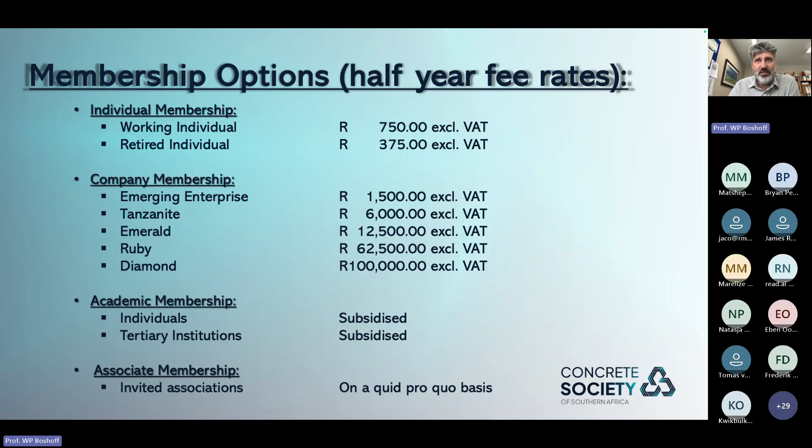And then also associate members. Just who are our members at the moment? We've got Diamond members. We've got Creso and Quick Group.

We've got Emerald members, the 6 companies listed on the screen now. Then we've got 2 screens of Tanzanite members. I'm not going to single anyone out, you can just see all their names. And Tanzanite members, the second screen, as you can see, is a number of people that's growing every week or every 2 weeks.

Emerging enterprise members as well, we've got 2. And then we've got associate members, similar organizations like us, just different focus, and we work together with these people. And then our academic members, you can see there are 8 of them involved.

Now, we've got these CONCRETEfix and CONCRETEclass webinars. Today is a CONCRETEfix, and why it's a CONCRETEfix is get your dosage or your fix of concrete knowledge of the most advanced and newest technology, research, practical implication, or practical products, or whatever. So it's really about the newest and the best and the latest in the industry and research.

Future dates to keep in mind: on October 23rd, Willie Steenkamp will be speaking, and Jaco Kokart will be speaking on the 20th of November. And then Vandi Ulefi from AECOM will be speaking on the 19th of February next year. We've already got them lined up. The exact topics we're still finalizing.

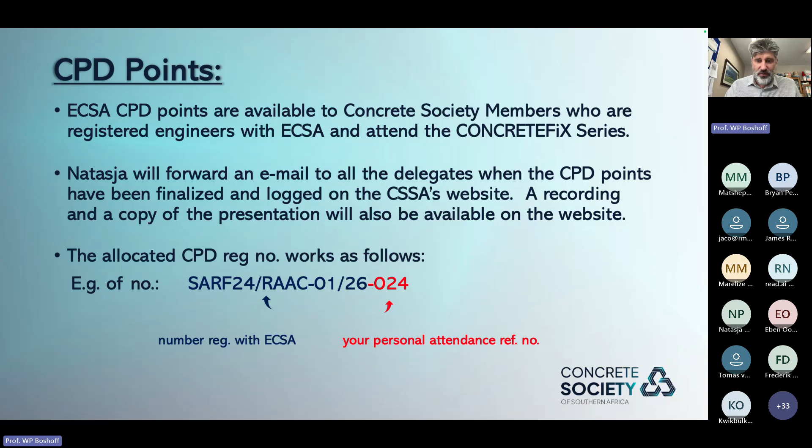And then CPD points, I've said in the previous 2 events, webinars, that we are behind. It's not really we behind as a concrete society, ECSA was behind with all the approval of the CPD points. They are up to date now, and we got all of that, and we're up to date as well. So all your latest CPD points, your numbers you need for submission, you will find on our website, you'll find the link for that on our website. And if you struggle finding the link or not getting your information, please contact Natasja at the Concrete Society.

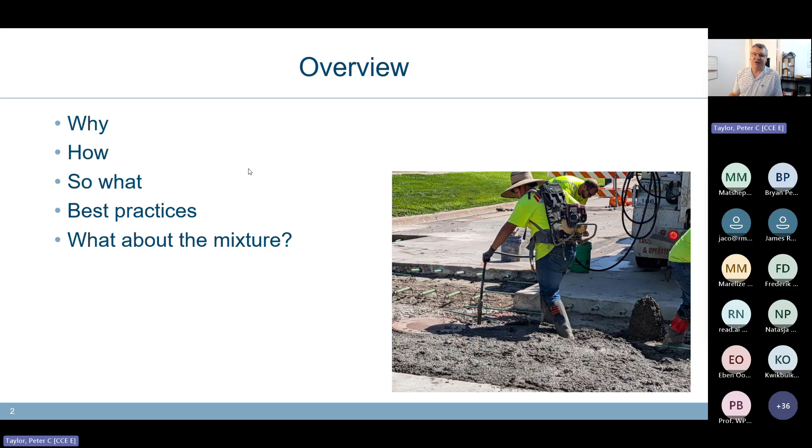So a very quick image here I tend to use just for a total overview of the things we need to pay attention to when building with concrete. And again, I need to emphasize: the institution I work for is entirely focused on pavements, but I think a lot of what we talk about, the thought processes, still roll over into almost any concrete application, running from RCC through bridge decks, structural concrete—I think we can make them all apply here.

But we start off the process looking at the performance of what we need—what is the strength, which every structural engineer lives and dies by—but what are the durability requirements? What are the levers that we can pull to get there? And then we need to do some measuring. Can we be sure that the mixture is going to deliver the performance we're looking for?

That's been the focus of the performance engineered mixtures program that I've been heading up for the last 15 years. Then the batching, making the concrete, the quality control, making sure we've got the right amount of water and air in the concrete. And yes, I know you don't need air, but it's a big issue in our lives.

Right now, today, it is 18 degrees, cloudy and beautiful as we head into fall. You guys are warming up and heading into spring, and you haven't had any freeze-thaw cycles. We're heading into a lot of them.

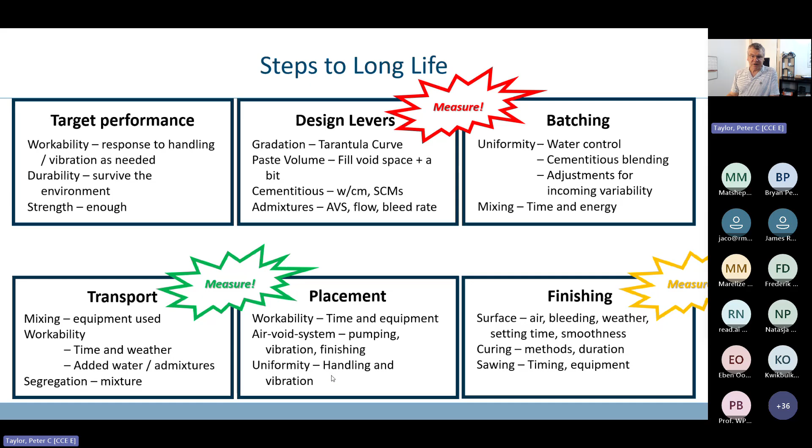So again, this is the whole picture. We're going to be focusing on the bottom middle for today's discussion. So why do we vibrate? Well, the obvious answer is to consolidate it, to get the big bubbles out of the concrete.

And this is not new. It's been in every book that I've been involved in writing, from Design and Control, Fulton's, and the IMCP manual. All of these publications say don't do it. So yeah, I know everybody does it.

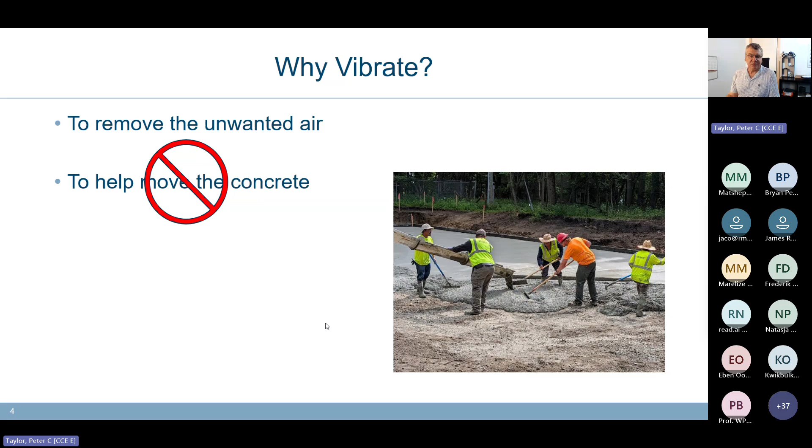Don't do it. We also use vibration to help bring a little cream to the surface so that the finishing crew has something to work with.

Now, sometimes the mixture is so bad it's beyond redemption. This photograph is from a test section we were building with a non-traditional cementitious system, and the delivery time was 40 minutes, and the admixtures had given up the ghost and left the mixture within 10 to 15 minutes of batching. And so what was delivered was a brick, and the crew could not do anything with this, regardless of how much vibration they put into it, how much floating they did to it.

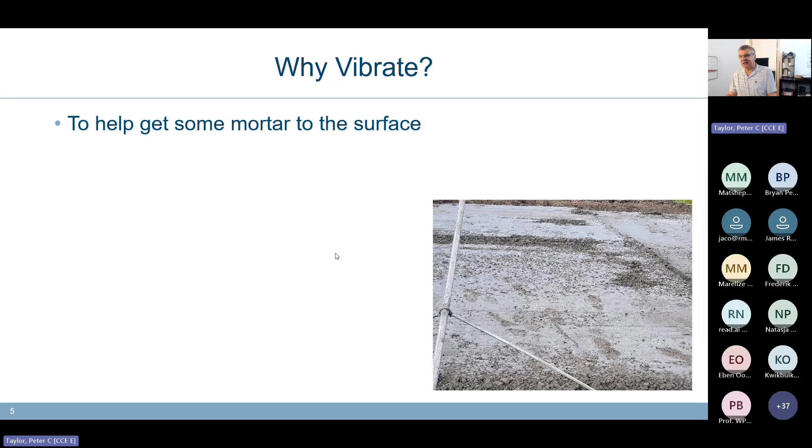In the end, after about half an hour, they gave up, moved on, and within a couple of hours, this was in the back of a dump truck being hauled away for disposal. So again, the mixture can have implications on what vibration we need to be doing on the system. This was an extreme example.

The interesting thing about this is that this gentleman was moving the poker about a meter every time he dropped it into the concrete. So, the sphere of influence is this much, and he was spacing it this much. Was it doing any good at all? Probably not. The other thing is that he had it in the concrete for less than a second. Again, was there sufficient time for it to do any work? No. So was it a waste of time?

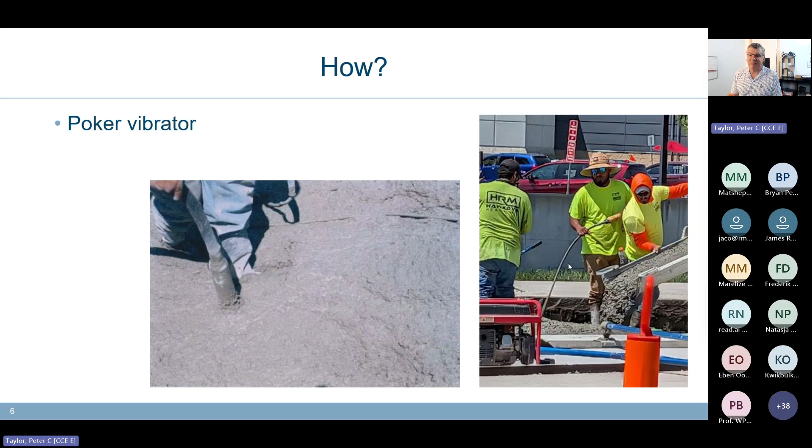Yeah. Is there a better way to do it? Yeah. Obviously, he'd never had any training. All he was told is dip it in the concrete occasionally. And that's exactly what he was doing. We need to help people like this with here's the way it should be done. Yeah, and I know I'm a professor, I'm a lab rat, but it's important for us to get the theory and the best practices into the hands of the people on the construction site.

Somewhere in my slide deck, I have an image where the hydraulics had failed on one half of the machine, and the other half they were still running. There was a very clear difference in how the concrete looked in the machine due to the action of these vibrators. I spent 2 days searching for it, and I couldn't find it.

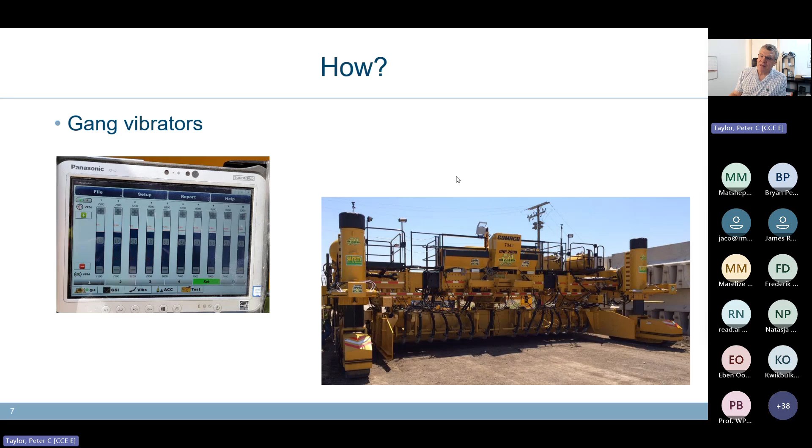I'll probably come across it later on this afternoon.

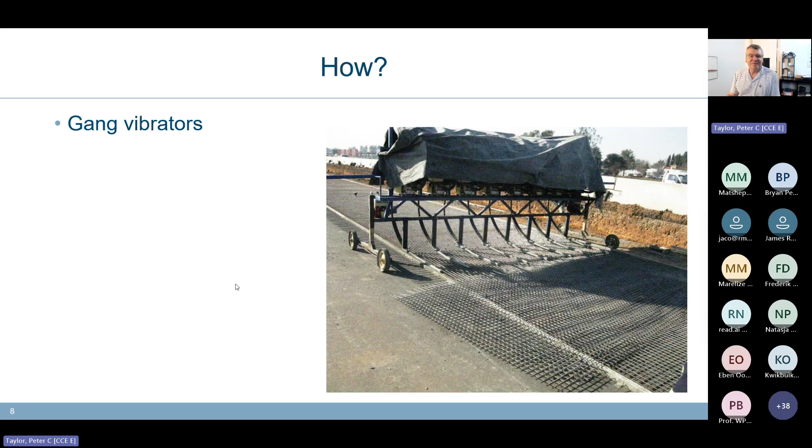Okay, then there is the Boer Plan version. This actually comes off a roadway in Gauteng, which I was visiting with Bryan Perrie probably about 10 years ago. Really cool stuff, this is great stuff. It was perfect for the application. One of the big things that's different between American practice and South African practice: here in the USA, people are expensive and machines are cheap. The exact opposite happens where you are. So this sort of setup, with cheap machines and a couple of people to move it around, that's a cool answer. Great. All right, another tool is the vibrating screed.

And again, I've got 2 different extreme examples here. This is that same site I was showing you before, there's the same gentleman. Here we've got another guy operating a screed vibrator, which is basically a beam with a lawnmower engine, probably a 2-horse, 1 kilowatt machine mounted on it. And this thing is jumping up and down a little bit. Again, is it doing much good? Well, it's certainly bringing cream to the surface. Is it vibrating the bottom of that 100 millimeter slab? Probably not, but yeah, at least we're getting a surface on it.

The other extreme is this nice, big, chewy machine built on a bridge, with quite a lot of fairly heavy weights on it that you can see along this shaft, and a fairly large lawnmower engine on it. My catch with this one is that look at the beam: the ends of it are riding on the old concrete or the forms. So that means the bulk of the energy is simply bouncing the machine up and down on hardened concrete. How much energy is actually going into the fresh concrete that we're trying to work with? I don't know, not a lot.

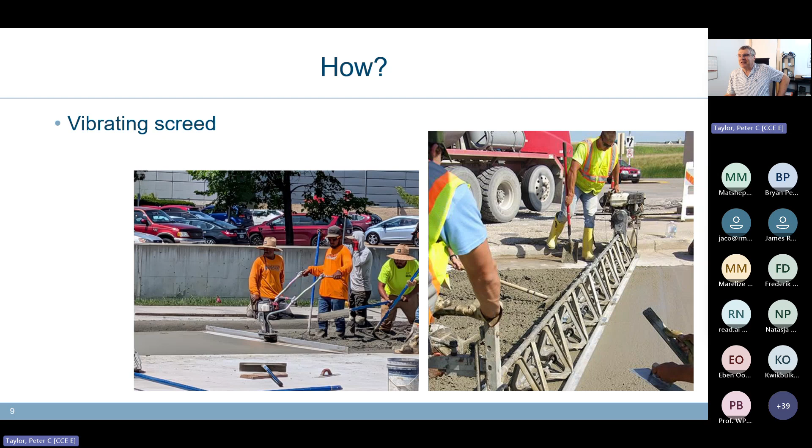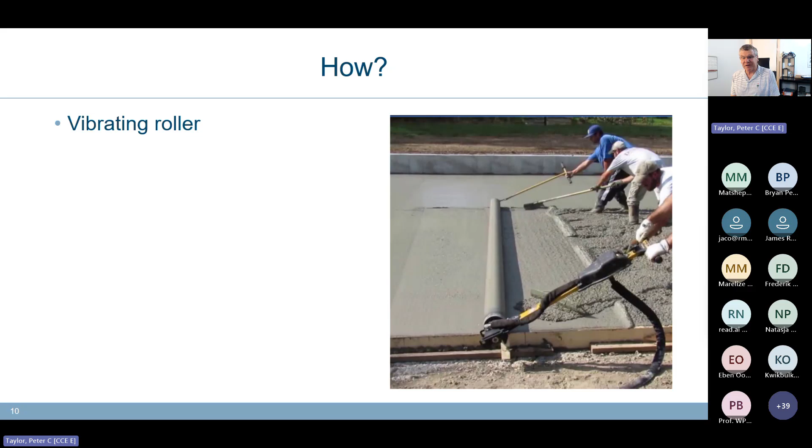So again, think a little bit about what are we trying to do here, and is the equipment we're using achieving that end? In both of these cases. All right, and then finally we have the vibrating roller. Again, how much energy is getting into this thing, how far the field of effect is. Now, again, this is very narrow, thin slabs, probably only 75 millimeters. That's doing a good enough job, we can live with that.

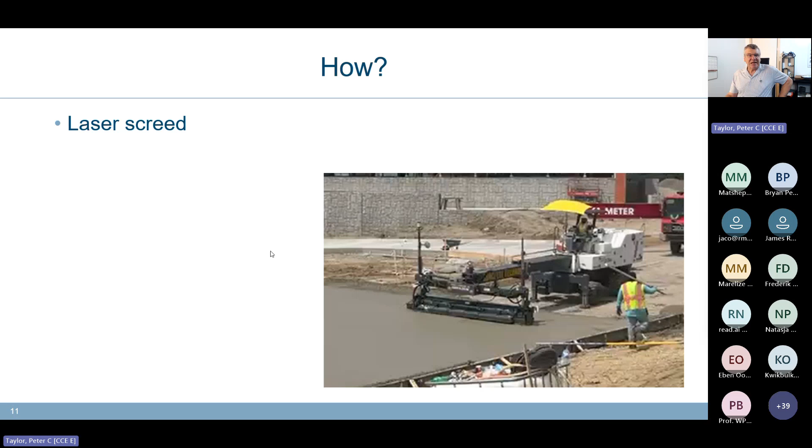The smart version of the vibrating roller is the laser screed, which is an expensive machine and one operator. It's laser controlled, tied to a pre-programmed GPS system. So all he has to do is say go, and this machine moves the arm backwards and forwards, does the roller placement. It's not a great image, this was actually taken on a construction site opposite my office last week, and we weren't allowed on the site. We were just peeking through the fence and trying to poke the camera through the gaps. Not a great image, but it does illustrate what you can use.

And then there are form vibrators. I'm not going to talk about those in depth. Again, they only affect the surface closest to the form. How much energy comes through these things? Do they do a good enough job? The primary application of these that I've seen is in tunnel forms, because there is no access to any other form of vibration. They have some application right there, but I'm not going to talk about those any further.

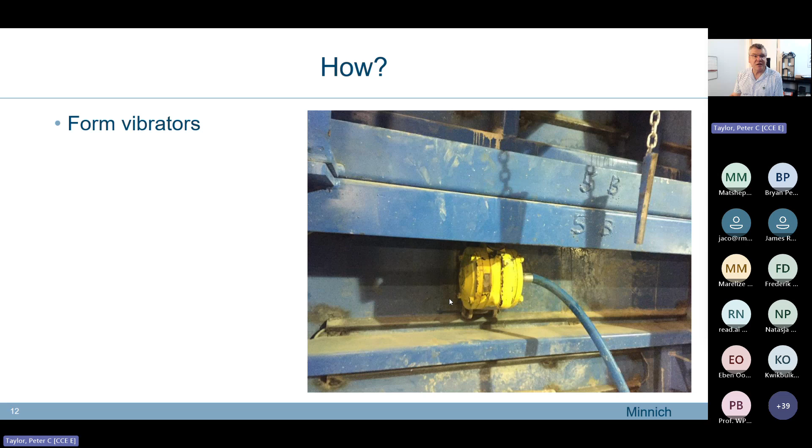So what? Well, let's go and do a little bit of rheology discussion. There are 2 parameters that we worry about in rheology.

There is the yield stress, which is the amount of energy it takes to start moving the concrete. How strong does the worker have to be to pick up the concrete with his shovel? On the horizontal axis is viscosity. How much effort does it take to keep the concrete moving and make it move a little bit faster?

All right, and again, I'm a dumb engineer. These are all fancy terms with exotic units. What does it actually mean? Well, let's make it simple.

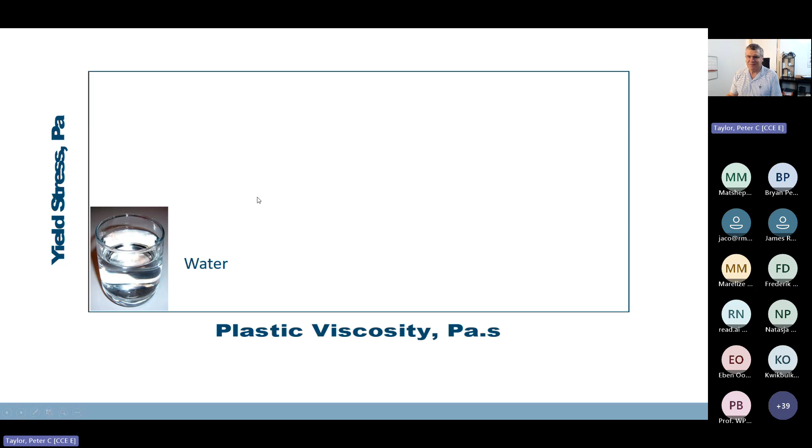Water has a low viscosity and a low yield stress. It fills the shape of the little glass that it's in very readily. That's why we have waterfalls and pretty rivers. On the other extreme is regular concrete.

It has a high viscosity and a high yield stress. It takes a lot of energy to move it, and it takes even more energy to make it move even faster. Fill up the other corner is honey.

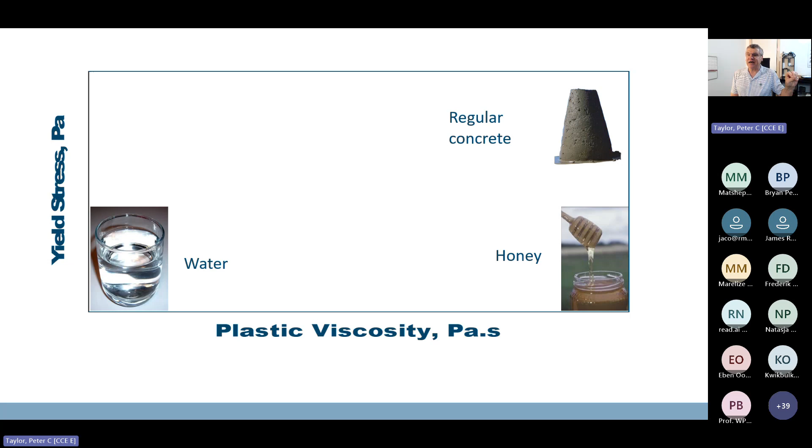You've all got at home the little containers of a honey pot shaped like a bear. And honey works in those containers because it has a low yield stress. It'll keep moving, but the viscosity is high, meaning it'll move slowly. And that's why we also have to have fancy dippers rather than spoons to get the honey out and onto your toast.

In the middle, self-consolidating concrete has a very low yield stress. By definition, we want concrete that flows under its own weight, but it does it slowly because it has a relatively high viscosity. How many hours have you spent waiting for the flow test to finish? I couldn't find anything that fits this other corner, so we will move on.

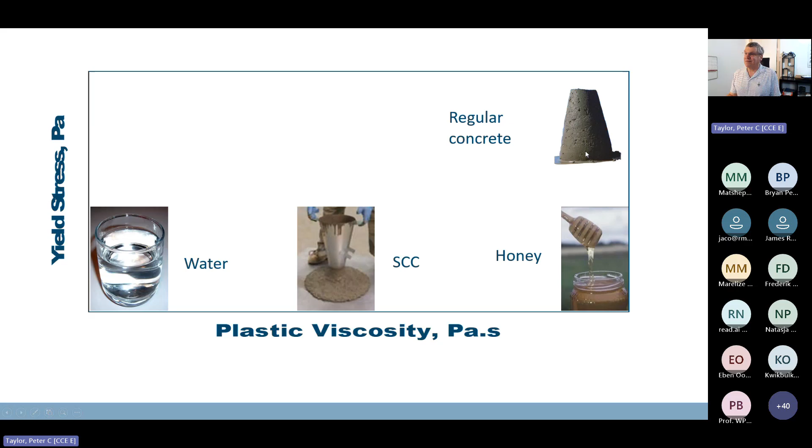Having defined those terms, when I talk to people who are experts in rheology and say I want to apply these concepts to concrete, they'll laugh at me because rheology is the study of fluids, and this stuff is no way a fluid, except when you put energy into it or change the chemistry of the system. So on the same axes, we're at a data point for a given piece of concrete.

If we put superplasticizer into it, it lowers the yield stress predominantly, with some small effect on the viscosity. If we put water in, it also lowers the yield stress. Water is a lot cheaper than superplasticizer, and that's why every ready-mix truck that arrives on site, the supervisor says add 40 liters before he even looks up from his newspaper.

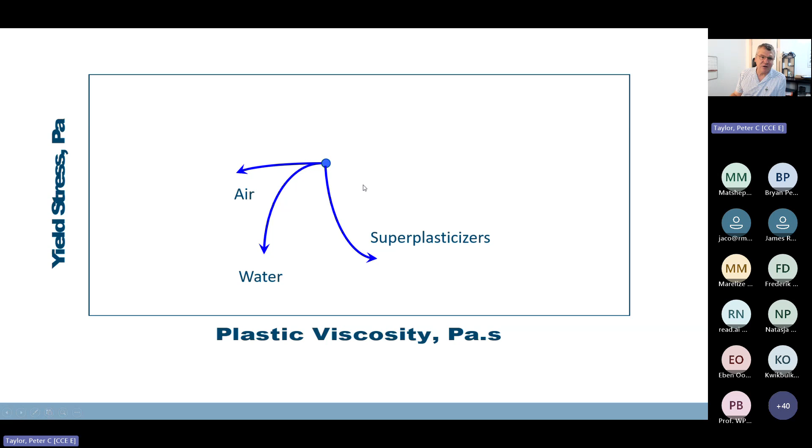Not good practice, but very common. Air changes viscosity, but not yield stress. Silica fume changes viscosity, but it makes the yield stress go up, stiffening the system at higher dosages.

What happens if we put a vibrator into this concrete? Conventional wisdom is that it has a significant effect of dropping the yield stress, and a lot of the theory and teaching has been based around that assumption. That's not a bad assumption, but based on what I'm going to be presenting in a few minutes, I would also argue that it has some effect on the viscosity.

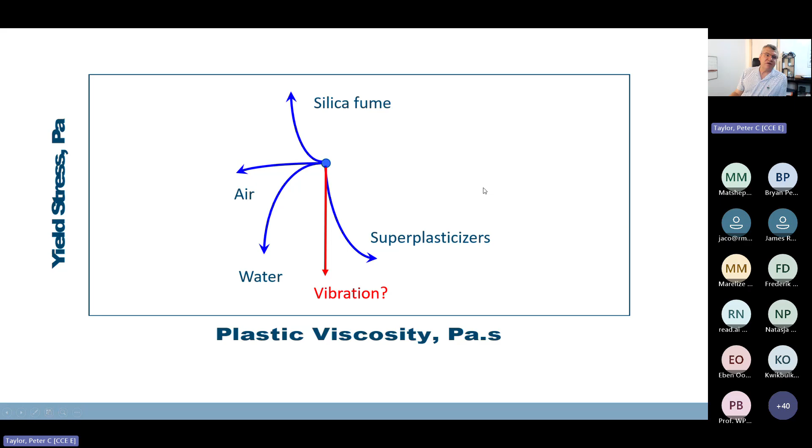It's not a straight up and down, it's more likely to be following the line of the superplasticizers. So vibrator reduces yield stress. We put a shaft in, it vibrates, it oscillates. What does it do to the yield stress?

It reduces it, which means air bubbles can float up because there is less yield stress slowing them down, preventing them from moving through this very stiff mixture. The conventional wisdom at present is that the amount of energy we need to be putting in, expressed in units of gravity or acceleration, is about 3g. Has that been finalized? Maybe not.

Water moves horizontally, and I'll justify that position. This is a relatively new thought, but it has fairly significant impacts on what we should be doing on our construction sites. It also causes the aggregates to wobble as it's being vibrated.

I had a photograph where somebody had placed concrete with misshaped aggregates that were long, flat, and thin, and in the photograph all of them are horizontal. That can't be because during the mixer they would have been random, but once they'd been vibrated, they'd all rotated under the action of the vibrator, and they were all sitting completely flat. Another hint from my photograph system.

They can also sink, and we get segregation, because as the yield stress of the system drops, the heavy particles sink and the light particles go up. Again, we're deliberately doing that because we want the excess or high-sized air bubbles to float up and get out of our concrete, because we want a nice, dense, well-consolidated system.

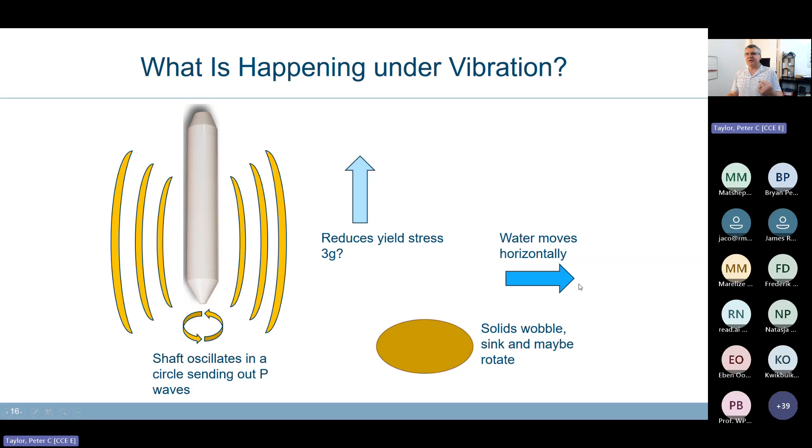But we need to also think about how much influence does a given vibrator have. Early on, I indicated there was a 75 millimeter head and another guy with a little 25 millimeter head. The 25 millimeter head is reported in the manufacturer's guidance that it has a 100 millimeter influence. That 75 one is probably closer to, I'm going to forget my units, 200 millimeter sphere of influence, maybe 300.

That radius depends on the amplitude of the device, and that's controlled by how much offset there is on that heavy weight. It's the frequency, the size of the weight, and there's also impacts of the mixture.

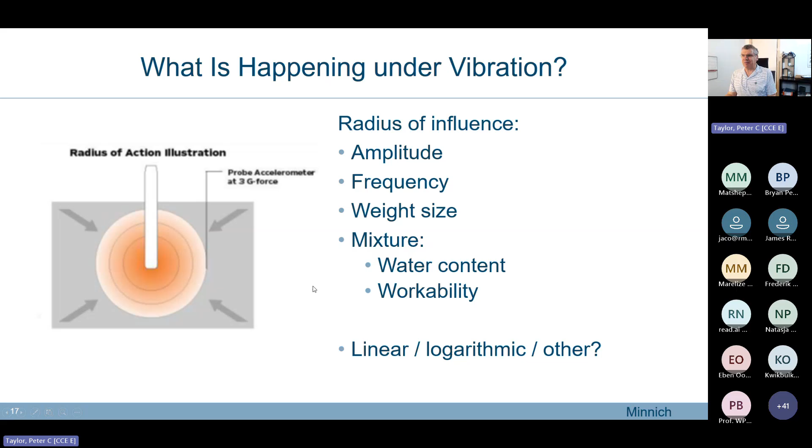Again, as engineers, we like simple rules of thumb. My challenge is to say it's not just 200 millimeters - it will vary depending on all of these parameters in front of us. The fall off, is it linear, logarithmic, or some other model? We're still working on that. I suspect it's logarithmic, so the closer you get, the more and more influence you see. But yeah, we'll probably report that in a year or two when we get the work wrapped up.

So the impact, it moves air, and this is good. We get the big bubbles out of the concrete because these don't do anything for us - they reduce the strength, they increase permeability. How much is bad and how much is good? Also a topic of debate.

Whenever I go to Australia and present there and I show a photograph like this, which is a fairly typical image of a core from a roadway, they have quiet hysterics because the specification in Australia is that the density of the concrete in place has to be 98% or more of the theoretical maximum. And I suspect that this one does not comply. Do we have a problem with that? This core came from a perfectly well-performing concrete.

It was actually the companion for a bad one, so this was the control good one, and this concrete's performing fine. So is 98% the right number? I don't know - more work needed. We've got to figure that one out.

But we are also moving some of the bubbles out, if not most of them. And again, how long do we wait to get all of these bubbles out of the concrete? That's part of the question. Do we remove good air? That's a point of discussion. It's fairly traditional for us to say, don't over vibrate it because we're going to beat out the good air.

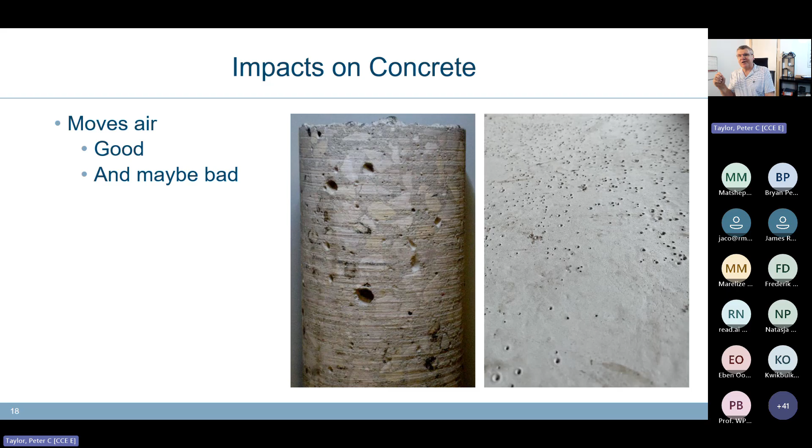Maybe. And here's the justification for that - moving air can be modeled using Stokes' law. Now, Stokes' law simply describes mathematically how fast a bubble will float up in a fluid.

Traditionally, again, when I've been on construction sites, the operator, if he's well trained, doing things properly, we're probably looking at about 15 to 20 seconds before the big bubbles stop rising to the surface. We're good to go - next, move to the next location.

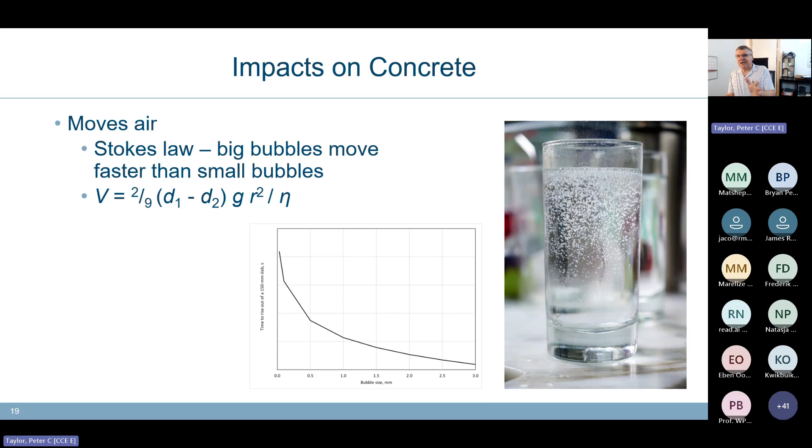So the lower the viscosity, the faster the bubbles will go. The higher the viscosity, the slower they will run. And that's why I'm also thinking that chart, viscosity has an important part on the impact of vibration, because again, we're vibrating to get the bubbles out, and the big ones.

So some work that we did some time ago, and we're actually repeating and enhancing, filling up some of the unknowns, is an exercise we did where we had, I think it was a 120 millimeter long, 100 millimeter wide - I've got to get another units are in the next image - but it was a wooden box with some rods of different lengths.

Sensors connected by magnets to each of the ends of those rods, tied to a device that measures the amount of energy being received by that sensor. We wanted to see how the mixture variable impacts how much energy is received at the tips of each rod, so the rods are there just to transfer energy to the sensor. Fill it up. You can see it was a 25 millimeter head poked in vertically into this space.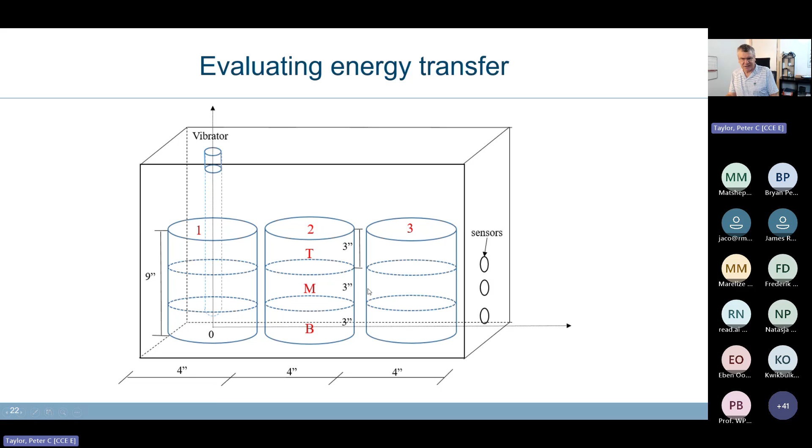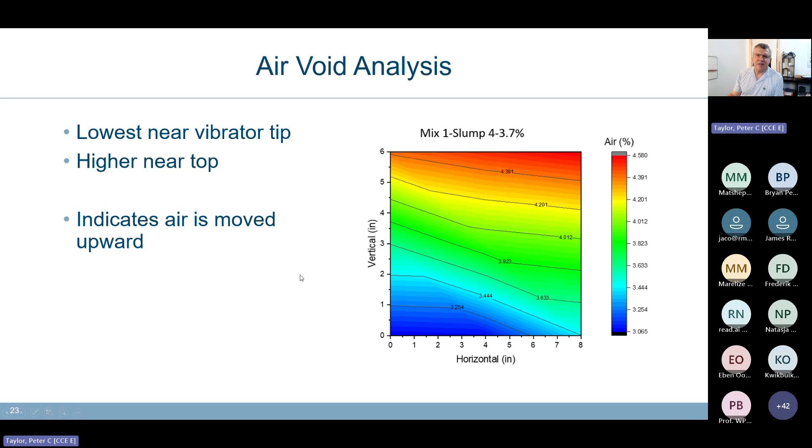What we showed was that right next to the tip of the vibrator was the least amount of air. Furthest away, at the surface, the air was higher. So there's certainly a trend of moving air away from the vibrator. Following that model I had earlier, I'm beginning to think it's a power curve, that vibration is very effective at moving big bubbles. How big is big? Typically we say 1 millimeter is about the limit between a bad and a good air bubble, so it's getting all the big ones out relatively quickly - vibration does just that.

I'm not going to harp on the air void system too much because you don't care. This is the one that's really interesting - this is where you pay attention for the next 3 minutes. It also moves water. What? Yes, vibration moves water, and it moves it horizontally.

This is a very simple but efficiently demonstrating toy that Tyler Ley from Oklahoma State University did. He took a standard bucket and punched little holes in it, I think 4mm, all over the bucket. He then stuck a poker vibrator into the middle of the concrete, and you can see water, paste, fluid flowing out of this bucket. I was reluctant to put videos into this presentation, but you can see all of these holes have water pouring out of them.

This is a vibrator running at 12,000 VPM. He then did the same exercise at 6,000 VPM - there wasn't any water coming out. Aha! Slowing the vibrator down reduces how much water, or how fast the water is moved through the concrete horizontally.

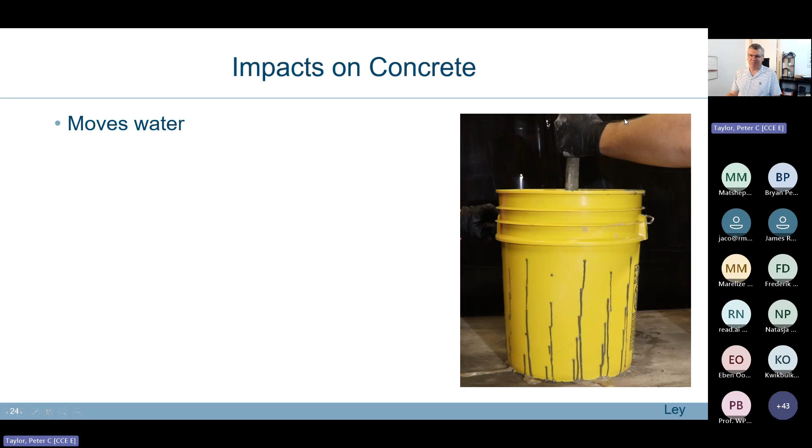So what? Big whoop. Well, here's why. How often have you stared at a wall with pretty bad honeycombing at the bottom? How often have you fooled around with the sand content, the water reducer, the super plasticizer, or even viscosity modifying admixtures or rheology modifying admixtures to try and prevent just this? I've been there, I've stood in many walls and stared at them wondering what went wrong. Well, here's what went wrong - the vibrator was running too fast.

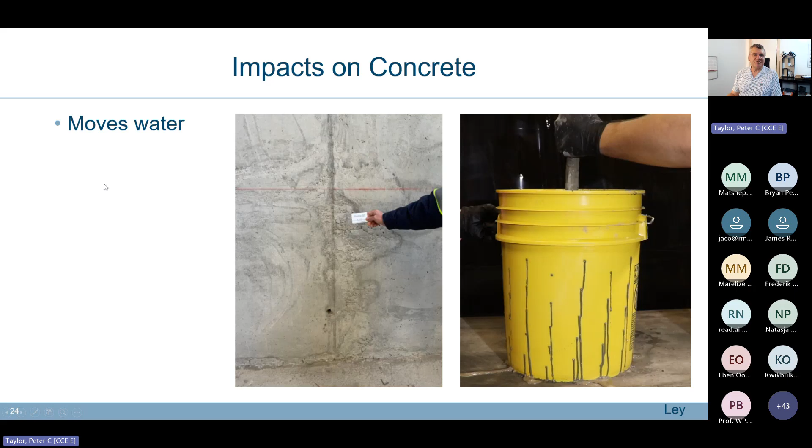That's a new thought, but it's real. Here's another exercise: a contractor had to do test sections for a big project, and they had very tight limitations on what the off-the-shutter finish had to look like. Same concrete, same day, same types of forms, same operating crew. Vibrator running at 12,000 - all sorts of distress. Vibrator running at 6,000 - beautiful concrete, a couple of little bug holes, but none of that ugly stuff on the surface.

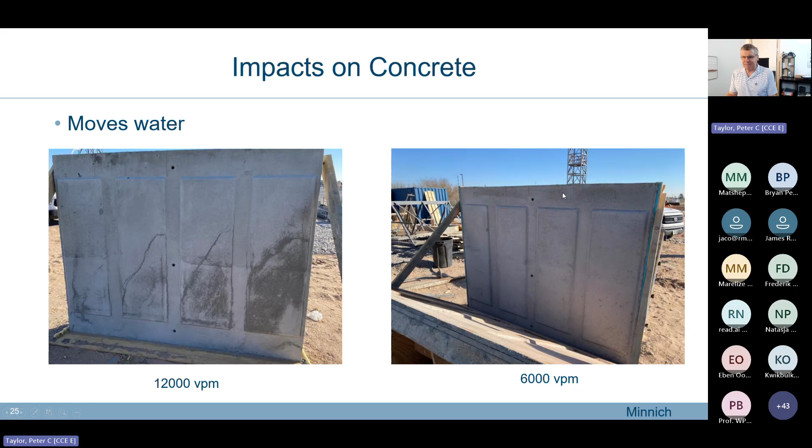We've got some cores in the lab at the moment - they punched cores through these things. We've measured resistivity and didn't see much difference in the bulk resistivity through the concrete. I'm picking up the cores tomorrow from Minnich, and we're going to do another little test to see if we can pick up the permeability at the surface. I'll show you what that test looks like in a bit. So in a couple of weeks' time, we should have some interesting data.

This test I stole from a petrographer friend. You drop 2 microliters, very small drops, onto a dry surface. If it's a cracked or sawn specimen, you try to avoid dropping it on the aggregate - you drop it on the paste or mortar. You start a stopwatch and wait to see how long it takes for the droplet to be absorbed into the concrete. It's entirely subjective, it's a terrible test, I'll never get it past ASTM, but it's really good for showing that the surface of the concrete is different from the heart of the concrete, and we've demonstrated that very, very clearly, often.

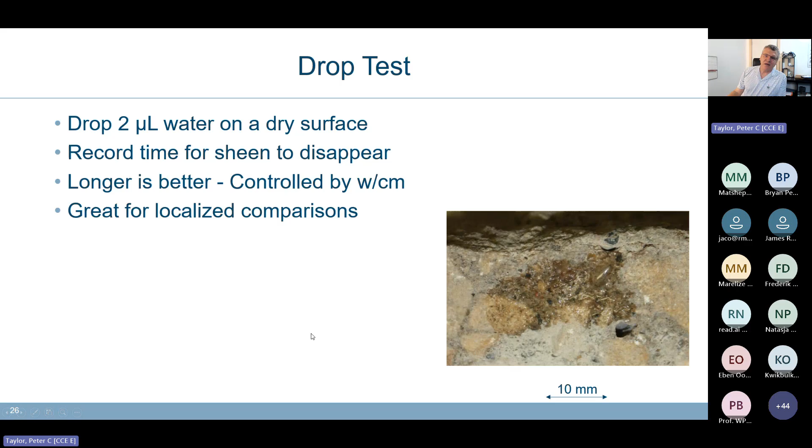We did that same test again—remember that box with the vibrator, 3 rods, and the cores we pulled out? We ran the drop test on those same cores and found the absorption time next to the tip of the vibrator was high, while the absorption time at the far corner was low. That tells me water has moved both up and horizontally from the tip of the vibrator.

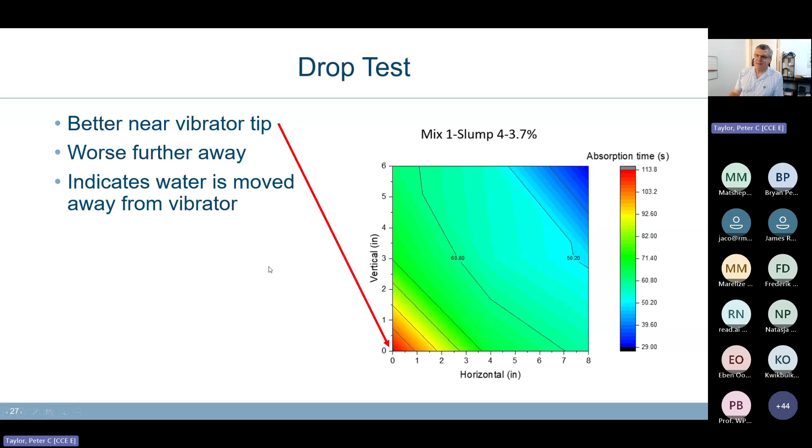So the vibrator is moving water away from the tip of the machine. This is a new thought. Vibrators move air up, water sideways. So what does that do to the aggregates?

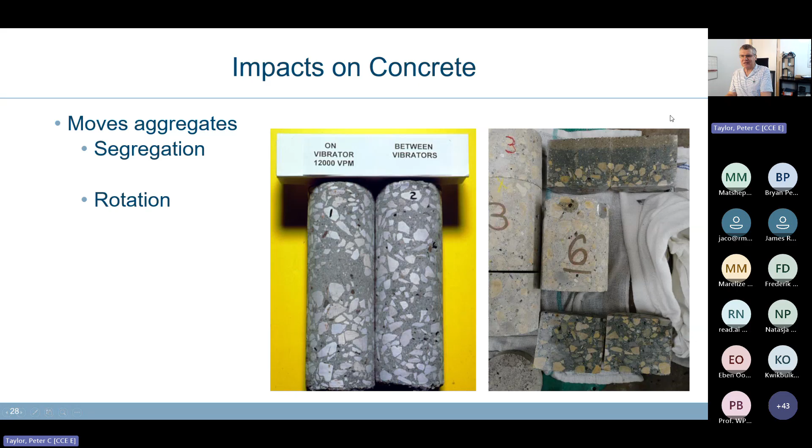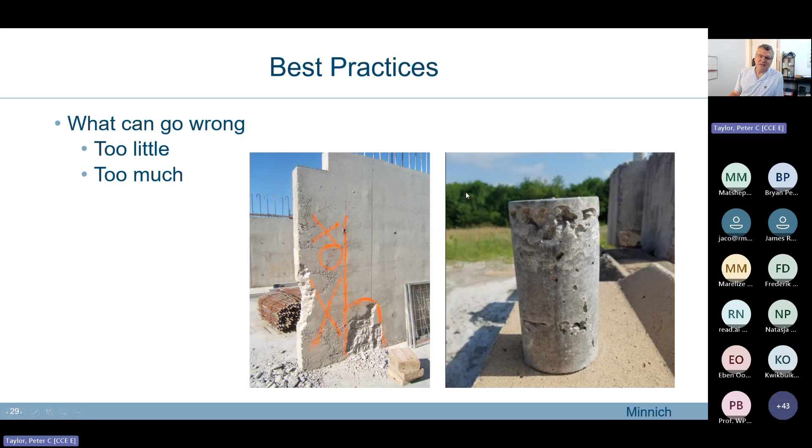We need to pay attention to both: a mixture that will survive vibration, and vibration practices that don't kill the mixture. So what can go wrong? Too little vibration, you don't get all the big bubbles up. Too much vibration, you get walls that look like that. We've all seen them.

This is one of the items being pushed through ACI right now—a table on the left showing how much energy you get out of vibrators at different sizes and speeds. If you've got a relatively small head at 11,000 VPM, you'll get the same energy as a big head at 6,000 VPM. High frequency will move water, and that's bad. Low frequency doesn't move water, and that's good. So if you have a choice, put a bigger head into your concrete.

There's also guidance in ACI 309 that the radius of influence is a function of the size of the head—the bigger the head, the greater the sphere of influence. This table doesn't take into account the mixture, but we're engineers, we like tables, we like rules of thumb. This is as good as we're going to get, and I suspect it will be changed in the new version of ACI 309.

Paul sent me the latest version yesterday, but he forgot to include this chapter. His apology email with the new chapter arrived after we logged into this webinar, so I don't have it—well, I have it, but I didn't get it in time to show you.

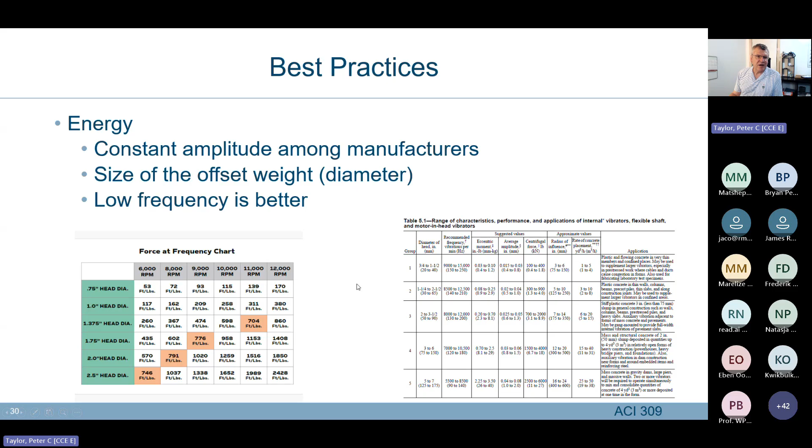So the guidance goes back to what I was complaining about earlier—crews that weren't properly trained. One thing you need to teach them: put the vibrator in vertically, don't do this game of different angles, and put it in close enough together. Know the sphere of influence for the concrete you're working with—you can often see it. Put it in, and very quickly you see paste rising to the surface.

What's the diameter of that sphere? Put the next poker in just about where that one ends, so you get plenty of overlap between these, maybe 1.5 times the difference. Make sure you're getting enough energy. Here we have a slab on grade where the top is well vibrated and the bottom is less so. Does it matter?

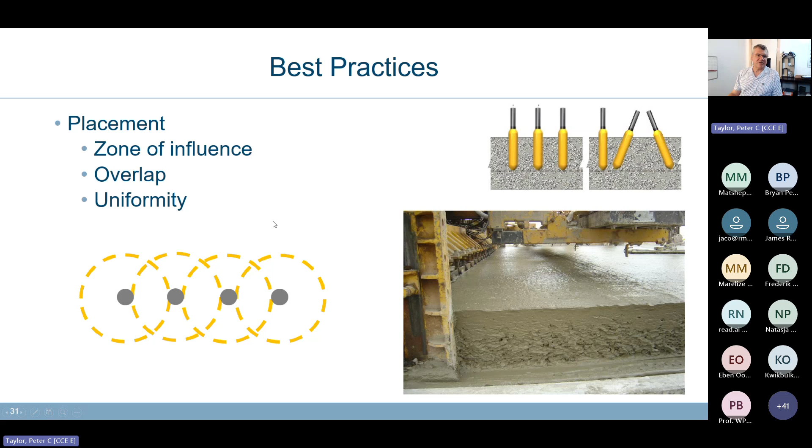Probably not, because this is daily practice and we're not seeing a whole lot of distress. But we need to worry about the zone of influence, the overlap, and the uniformity of our practice, because if it doesn't get vibrated, that's not great. We also need to worry about how much energy is arriving or being distributed.

This was from that box exercise. We measured the vibration energy for a 25 millimeter slump and a 100 millimeter slump with similar air contents. What we found is that the amount of energy being transmitted was way lower through the low slump mixture. That's reasonable, because if you've got a stiff mixture, it's going to absorb that energy rather than transmit it. Water transmits energy very readily. Dry materials wobble, so they absorb that energy.

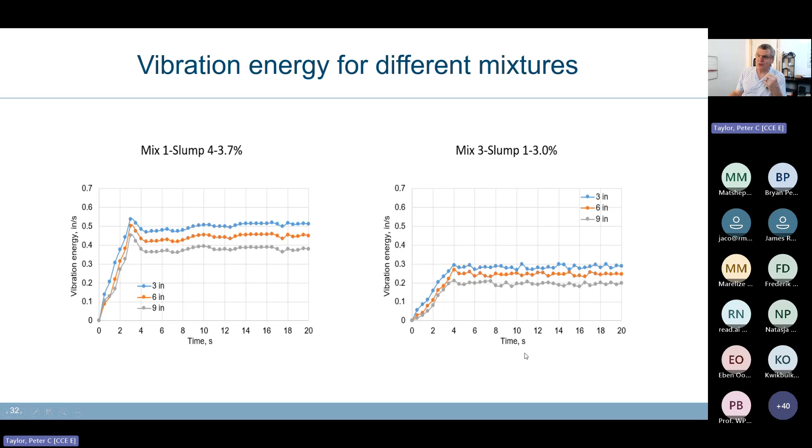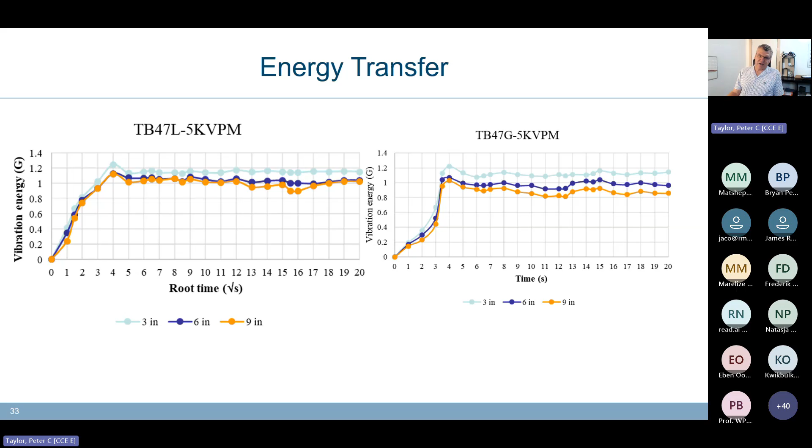Here's a similar exercise with more recent data. This is a limestone aggregate, this is a gravel aggregate, and again, not a lot of difference. I was kind of expecting to see more variation between these two, but yeah, the type of aggregate, whether it's rounded or crushed and angular, can make a difference, although not huge.

When do you stop vibrating? The rule of thumb has always been until the bubbles stop appearing. That's pretty subjective. The 309 guidance coming up is around 1.5 to 3 seconds in a vertical application. If you're running in a paving machine horizontally, it's 10 to 20 seconds per cubic foot. We'll have to do the conversion for you.

Do we need to tie it to the paver speed? Yes. Can modern pavers do that? Yes. Have all of them done it? No. Have we figured out how to tie it together, what parameters, the on-off switches we need? We don't know yet. We will be building an airfield runway in Charlotte probably early next year.

We're going to run tests with the paver fast and the vibrator slow, and the paver slow and the vibrator fast. What if we stop the vibrator or stop the paver? Do we or do we not stop the vibrators? We're going to build cores out of that and look at the surfaces. This is part of a $1 million, or $1.5 million project that I'm helping to manage. A year or two years from now, we should have some really great data on that practice.

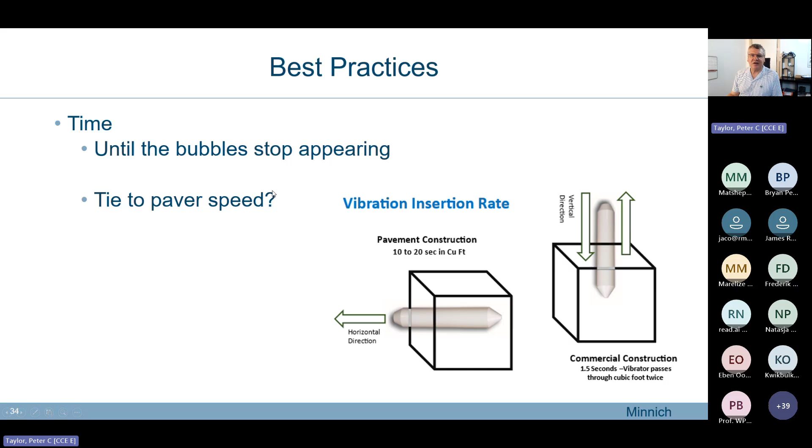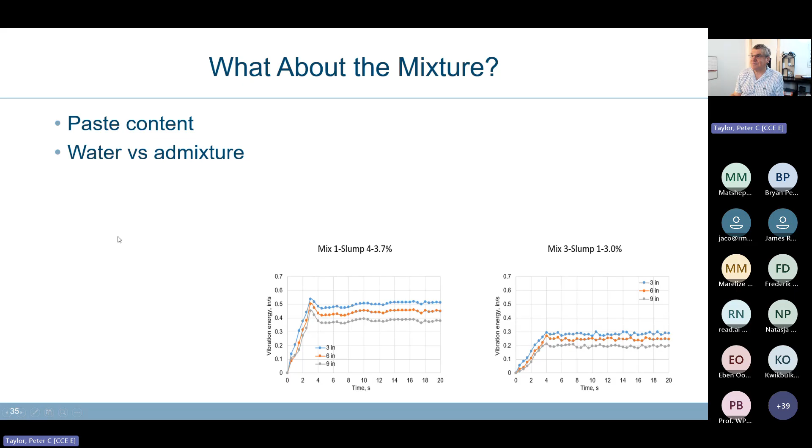Do admixtures and water behave the same? No, and again, this is ongoing work. I don't have any firm guidance right now, but I have students in the lab today doing some of this work. What about the gradation of the aggregates?

I know I've got 1 minute and about 3 slides, so we're in pretty good shape. Here is a mixture placed by a contractor. You can see lots of surface bug holes; he was really struggling to make a great surface on this concrete. They contacted me, and we fooled around with the gradation of the aggregate system. We didn't change the aggregates, just the ratios of the coarse, intermediate, and fine. We actually took out 50, or about 40, kilograms of cement. This was the following spring. Beautiful. Saved him money, made better concrete.

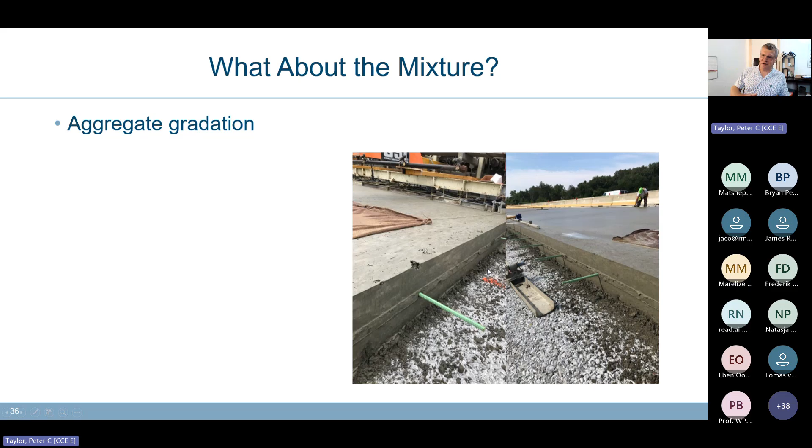We also tuned the vibrator system. Again, paying attention to the mixture and the vibrator system, we slowed the vibrators down, and he was getting better concrete at the end of the day.

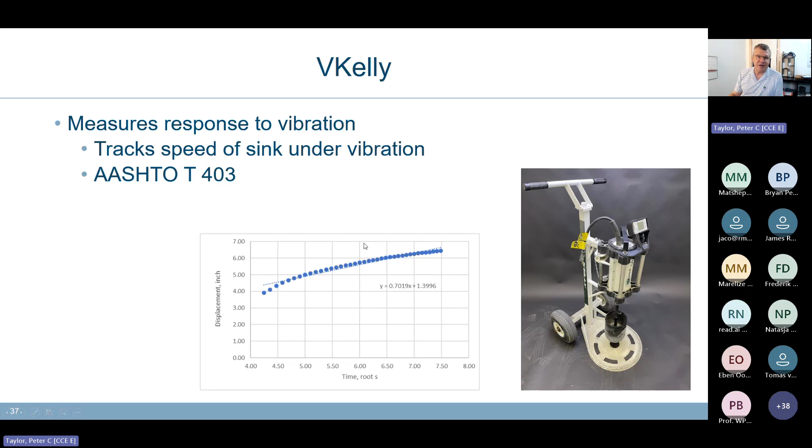So how do we measure this in the lab? This is a little toy we've been developing, called the V Kelly. It's based on the original Kelly ball, which was used to measure slump by measuring how far a hemisphere falls into the concrete under its own weight. I bolted a vibrator to it, and what we found is that the rate the ball sinks at, by square root of time, is pretty linear. We have an AASHTO test method to define how to do this test. Does it work? Yes, we did.

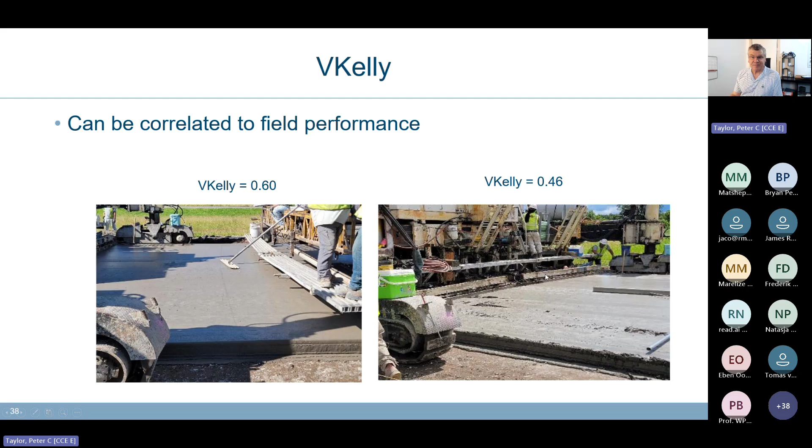So we're trying to figure out the effects of admixtures, different types of admixtures compared to water. We're trying to understand better the effects of water and air, and the effects of paver speed. That's the FAA project, where we're trying to install better monitors on the paver. The thought process is to put a pole, a bit like that ball, horizontally in between the vibrators inside the paving machine and see how it responds to the energy coming from the vibrators it's in between. Can we correlate that to the quality of the mixture being delivered?

So then we can start automating this thing. If the sensor is saying, I hate the mix, it can phone the batch plant computer and say, fix it, rather than having the site supervisor call the batch plant operator and make comments about his mother. It becomes automated, and personal relationships are very well improved.

All right, the other thing we're doing: the V-Kelly as it stands, with the small head, only works up to about a 75 millimeter slump. We're just getting started on putting a bigger head on it and seeing how it works with structural concrete. We've done one test and it's looking pretty promising. So that means for structural concrete, bridge decks, walls, columns, can we get similar information? Is the mixture going to respond well to vibration? Can we get it fully consolidated?

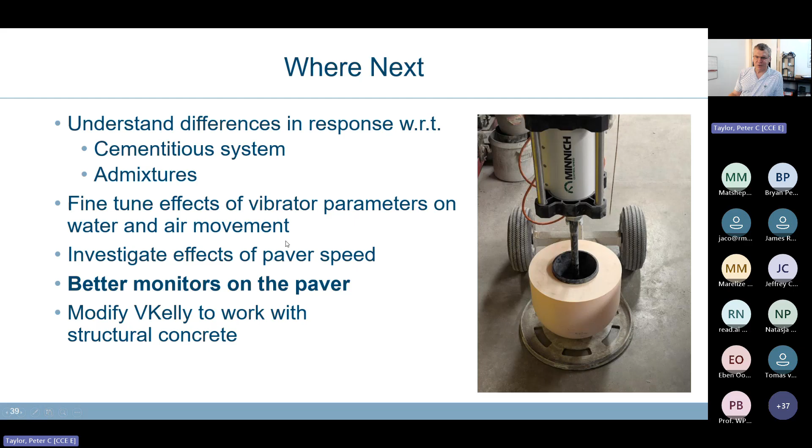And again, I can control the frequency of this device, and we can also pick up the effects of moving water and moving air. So, a lot of questions, a lot of thought-provoking thoughts, I hope.

Billy, I'll give it back to you and invite some discussion. All right, thank you very much. And we can give him a round of applause.